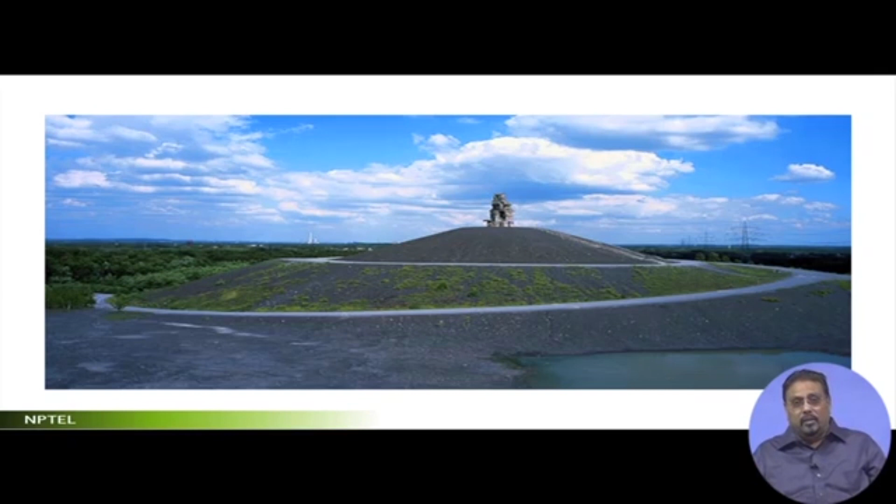One more picture. Look at this. It was also another very low-key slag dump. I may be showing some more slag dumps later which have been converted to landscape, because the slag dump is a very strong reflection of a high altitude landform, and that is man-made. Here, look at this. What is the role of this landform design in my landscape? Just look at the picture where my cursor is running, if it was just dumped like this, there was no harm. It was just a dump, which we call in mining engineering terms overburden, left over there.

But when you are converting this to a landscape, then there are certain things which are coming in. The utility of it, the profile of it, the look of it, the actual functionality, and any other aesthetics associated with it. Then all these works started, like say, if it is aesthetics and accentuation, let there be a sculpture at the center, at the pinnacle. If there is a sculpture, whether it is to be viewed from away or should it be viewed from close.

If it is to be viewed from close, people should be allowed to go to the top, and if they have to go to the top, there are many ways of doing it. You can always take steps and ultimately go like this, as we do see in many of the hill temples. But here the designer created an ambience which will have a serial vision, sequential vision. Always it will be changing.

If you remember, I discussed this in the circulation, when your trajectory, you are moving in one direction in a curved manner, at the same time you are also sloping down. I showed you that example when I was talking about the circulation. Here it is just the reverse. You are going in one direction and you are rising up. So naturally, at every point of time, the serial vision, the view frames keep on changing, and it gives you different kinds of views.

Let me give you an idea of the basics of the landform. What is the landform? It is a profile. We represent the profile in our drawing in terms of contours and slopes. You remember we discussed this in site analysis, investigation and appraisal. Whenever we draw an existing contour line, we draw it as a dashed line, and if I am changing this to a graded contour line, meaning proposed contour line, where some part may match the existing contour line, this is the line which will be continuous.

So in this drawing, the existing contour line came like this, the graded contour line matched with the existing contour at this point, and then changed to this level, this point. The levels here are the same. Originally it was this, now it is changed. The drawing on the screen has both, and in fact all your technical drawings of the landform must have both contours, so that the executioner can comprehend how it is going to be handled.

That means there is always an existing contour line and then a proposed contour line, which may or may not be matching, so it may change. But one thing, let me tell you, the existing contour line may be a little irregular.

An example, let me give again on this paper. That existing contour line, let me draw it in dashed line, may be going like this, and your proposed contour line is trying to go like this. Quite often you might find that the existing contour line is very irregular, but very rarely you will find that the proposed contour line is irregular.

You know why? The reason is that the proposed contour line is the handiwork of the designer, and the designer is trying to streamline the levels, elevations, slopes of that particular area. When it is done, very rarely irregularity comes in. It need not be a straight line, but it has to be a little more regular than the existing contour line. The existing contour line can go in any direction because that's nature's creation.

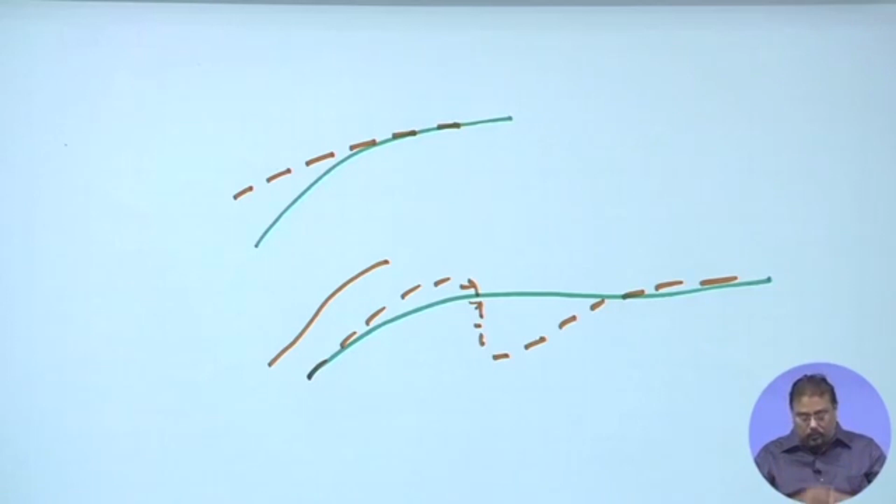Okay, if you have understood this, then let us see in this particular picture. At this point, I am not sure whether you are able to see, I can see an existing contour line which is going in this direction, and along the same place, the proposed contour line is going in this particular direction. Basically, what has happened is that this contour, whatever was the elevation, now has been changed to this orientation.

So originally, please follow my cursor, and even if you don't see, just follow the cursor and try to make an image of the line. This was the original line, and now this is the proposed line. So a drawing of this particular nature will always look very, very complicated.

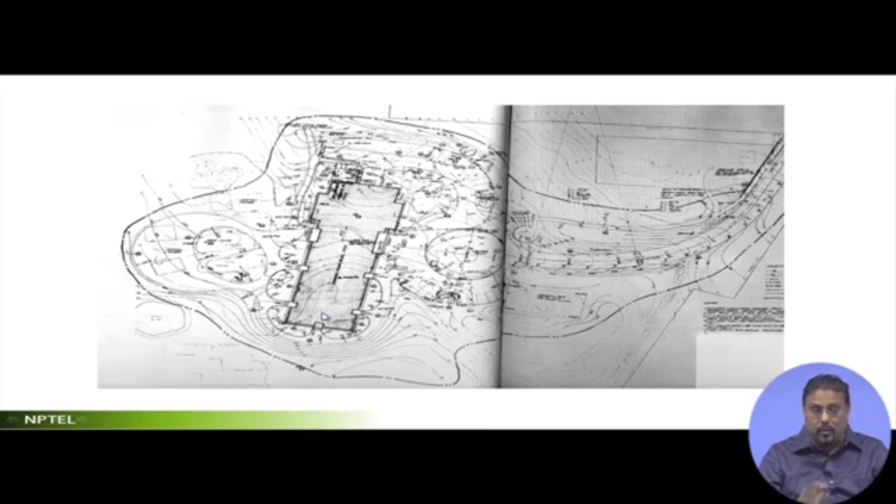Showing a picture like this will give an idea that, whatever direction the original existing contour is going, the proposed contour line is following some bit of regularity, some geometry, some technicality. So whenever you are handling this landform, this has to be very, very clear to you.

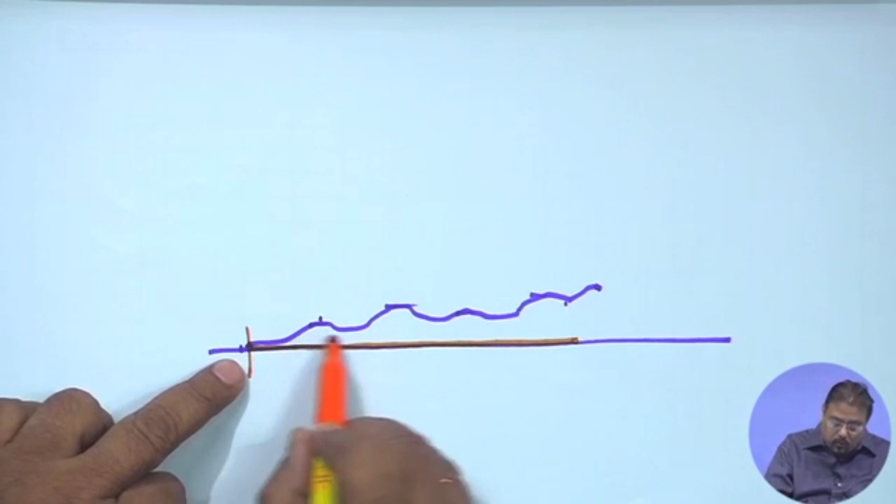If the whole area has to be made flat, and if I consider that these are different contour levels, in such case, to make it flat, think realistically, you have to push the entire set of soil to the edge. Once you push the soil which is protruding above to attain this so-called flat level, the whole thing will come here, ultimately get collected at this particular point and become a heap. I hope this is understood.

Option 1 is cut this, throw it somewhere else. Option 2 is cut this, dump it here. Now as soon as you have done this, the contour line which was originally at this particular base came down to this particular level. So the original contour and the proposed contour, this line has come to this. That means up to this level, the level is the same, and the remaining portion has been changed.

It is not necessary that the entire amount of earth that you have removed from here has to be dumped over here, but I will make a separate description for you on this issue. But the idea is the whole set of soil that has been removed and pushed and ultimately brought to this level gave rise to this particular picture here, a series of contours. If you look at it, a series of contours which are very close by.

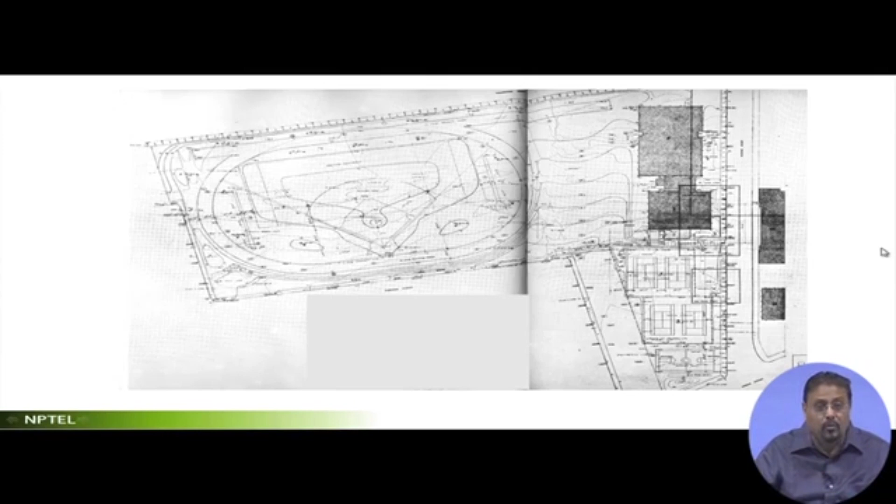That means if the contours are close, what is our inference? If the contour lines are close, that means they are steep. If the contour lines are apart, that means they are gentle. If the contour line is entering into another, that means there is a cave. If the contour line is merging with this, that means there is a gorge, the verticality. I hope you remember that I discussed it last time. So the point is, this is how you have to work out the whole landform design.

Now let me start a little formally on this issue. What are the aims of the landform? First and foremost purpose of landform design, people think it's aesthetics, people think it's looks. No, it is to achieve efficient drainage. Because the landscape project is outdoor, it is susceptible to rainfall, and that particular area has to be protected from waterlogging.

Rather, it has to be saved from waterlogging. What is important is the water has to fall and then immediately get drained out. If such a thing has to happen naturally without any external forces, then you have to give a slope. The moment you give a slope, which was non-existent earlier, you have created landform. Another thing, let me draw here for your understanding, because quite often I got questions from my students seeking further clarification.

Look at this paper. I am just drawing situations. If there is a land like this which is flat, if you create something, it is a landform. If you have a land and you don't do anything, it's a landform activity, because you are deciding to do nothing on this. If there is a mound like this which you want to flatten, this is landform activity. If you have a flat land where you have to dig by cutting, this is also landform activity.

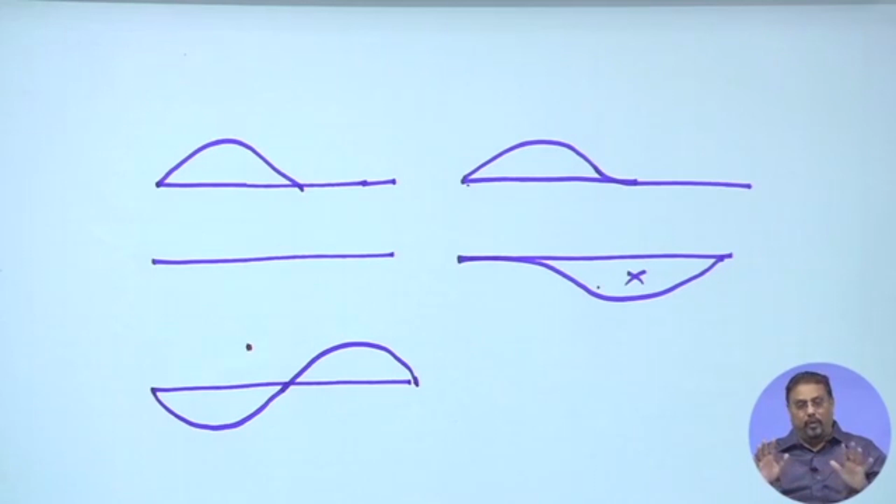And suppose you have a flat land where you have taken the soil mass from here and filled it up here, this is also landform activity. So landform activity means basically handling that profile. Here it was there and it has been flattened, and here it was flat and remained flat. Here it was flat, then you dug from here and filled up here, landform activity.

Here you had this created and then maintained it. In this you have created, in this you have dug it out and removed the soil wherever you wanted. All these are landform activities. So if everything is feasible and practically required in terms of landform activity when you are trying to get efficient drainage, this should not be missed. This point is very important.

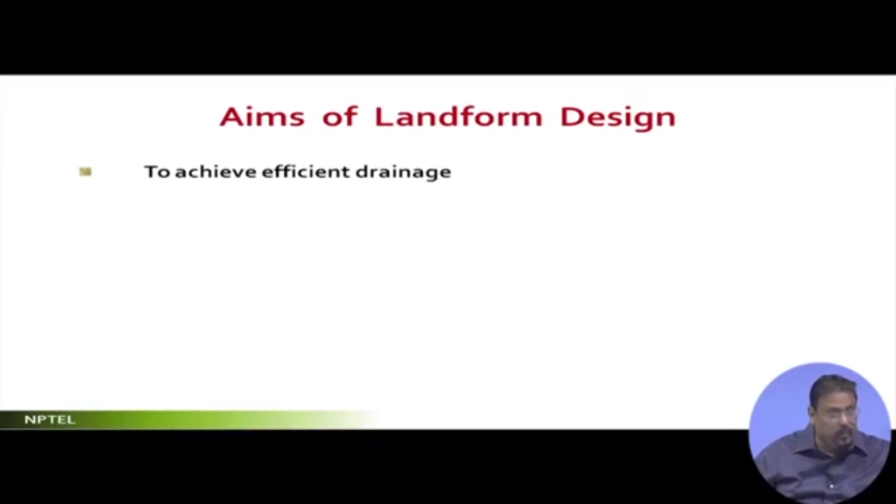Next aim is to facilitate the location of buildings, roads, etc. In the landscape, you are trying to locate buildings, different parts of the greens, gardens, water bodies, pathways, roads, fountains. So your landscape activity is not purely leaving it to nature. You are trying to bring in some elements, some components within your landscape. The moment you do it, you are ensuring that each of these components has its own place. That means this point refers to planning, how you organize, how you arrange.

Now if you look back to our historical examples, how they have developed, you will find they have followed this second point here. They facilitated different functions, different components within that particular landscape. This is the landform work. It means here you are deciding what is going to go where. Interestingly, I will come to one point, what analysis you have already done which makes sense for this. I will come to this after this slide is over.

Okay, so I am repeating, the first point is, whatever it is, you may do almost nothing for landform, but you have to do at least the minimum so that water rolls out and does not get logged. The second one is where, which functions are to be placed.

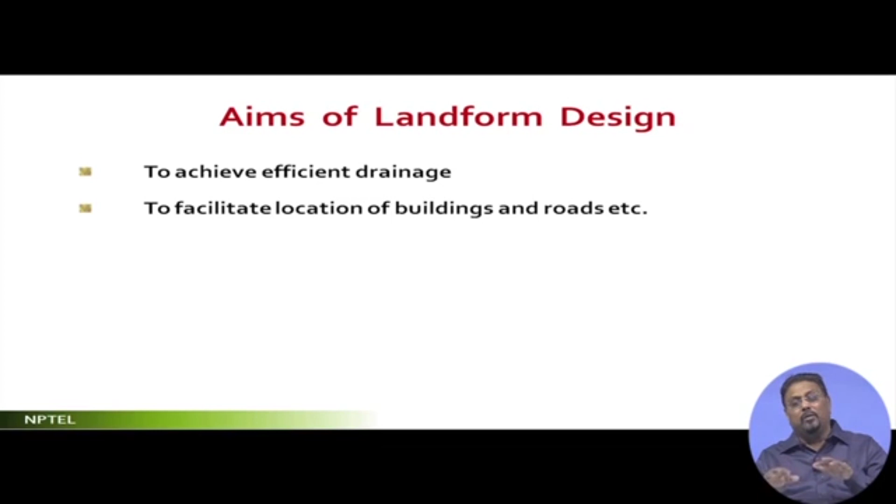The third, to create pleasing effect and appearance of the project site. That means now we are doing the landform work for aesthetic purposes, to bring more look, interesting look, aesthetic look, beauty to the whole site.

And then fourth one is to fit design elements to site. The difference between the second point and the fourth point is very critical. Never get confused. The second point is where you are going to place what, and the fourth point is how you are going to place a particular function. Where has been decided by the second point, so in the fourth point you are saying how it is to be done.

An example, let me tell you. I am trying to generate this particular idea for you. Suppose in the landscape I have a contour like this. In this contour I want to place some function which is going to be here. The moment I see this, I am seeing that it is very steep. So if I draw the section, the section is like this, and on which I am trying to put a building. What I have done in the first one is the second point, where it is to be placed. And what I am going to do now here is the fourth point of action in landform design, how I am going to do it.

So what would you naturally do? Either you prop it from below, so that this portion is supported on the ground and this portion is hanging above, and you are propping so that it does not fall. Another designer will say, no, I will not do this propping, I will add more soil here and seal this up and make it fully supported. So basically, initially you are facilitating location, and in this particular point you are trying to fit. For fitting there are lots of different activities.

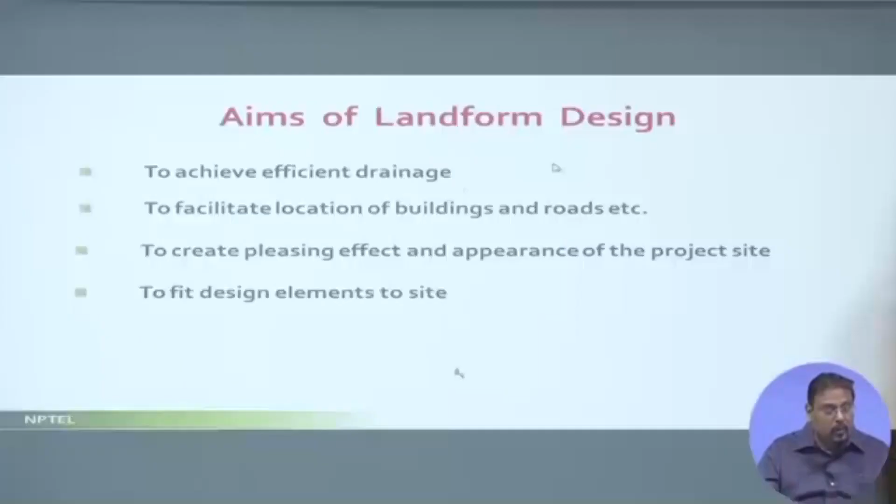Finally, there is a fifth activity, to perform reclamation activities. Reclamation activity has differential scales. Reclamation basically means you have some piece of land within your landscape project site which is now lying unutilizable. I won't say unused; unused is when you are trying to make use of the entire area. So I am saying unutilizable. This particular kind of part we call derelict land. That means it has some kind of problem, stability problem, depth problem, soil quality problem, whatever it is, but for some reason we cannot use it. To perform reclamation means I am now trying to reclaim this from the worst case to the best or better case. This is the landform activity.

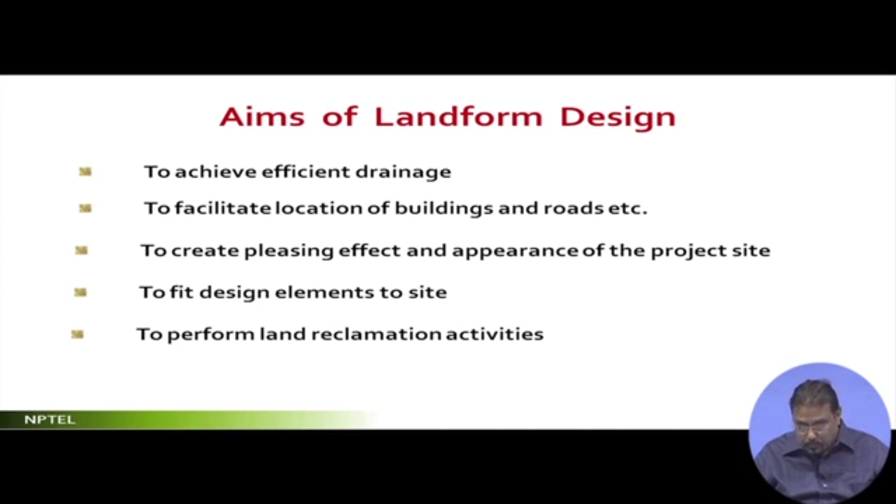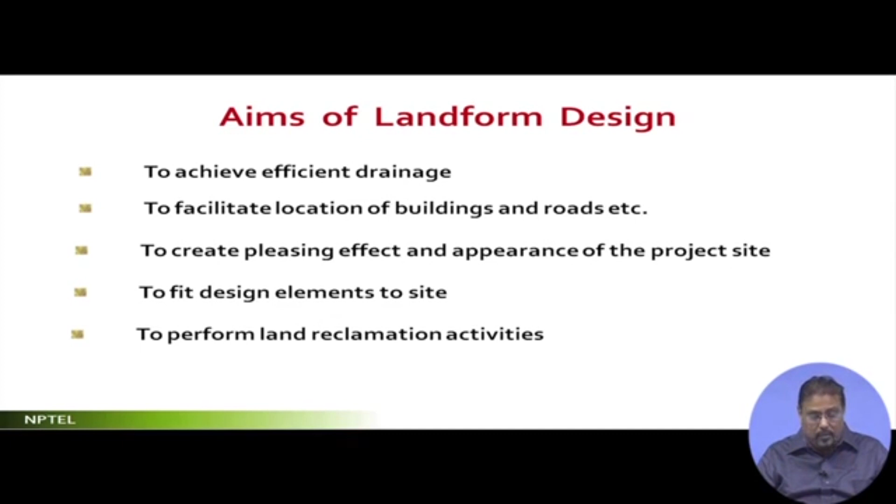An example, you must be seeing in urban areas nowadays strong reclamation activities going on rampantly without any regulation, and people are protesting it. In most urban areas in the suburbs of any part of our country, you will find there were originally ponds, water bodies. These water bodies had become dry because of hydrological changes. The water table depleted, and ultimately this became a kind of dry ditch. People are now questioning why should we have a ditch or trough which is dry? If this had water, people would have liked it. People say if it is not having water, then this piece of land, with a profile like this in plan, is underutilized or unutilizable. Let us make it utilizable.

The moment it is agreed by the owner or the people who are suggesting, you find that this is being filled up with soil. This is theoretically reclaiming the land from unutilizable, from derelict to proper. This is what reclamation activities are. I have given an example in small scale, but reclamation activity can go to a very large extent, a large area which is being spoiled, not handled properly. So this ought to be reclaimed to make best use of it in the landform.

Is that clear what is landform? Is that clear what is the aim? Now I will go technically forward to discuss various aspects of how to handle this landform. Okay, enjoy it.